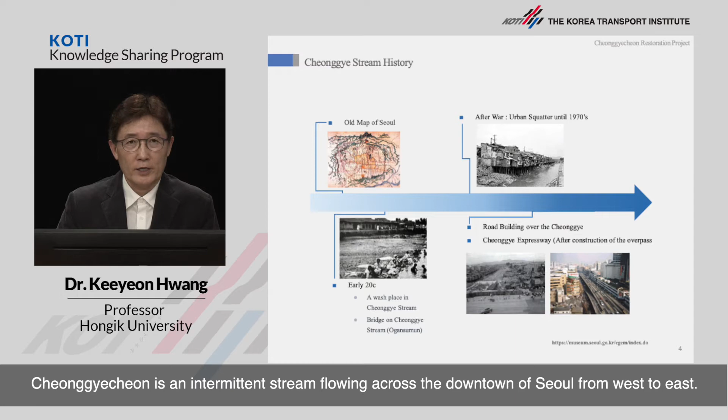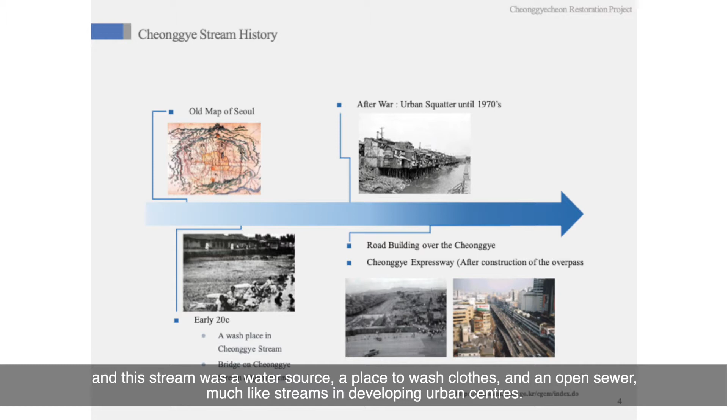Cheonggyecheon is an intermittent stream flowing across the downtown of Seoul from west to east. In 1412, at the beginning of the Joseon dynasty, King Taejong ordered for a brook developed into a stream named Cheonggyecheon. In the early 20th century, there were less than 1 million people in Seoul, and this stream was a water source, a place to wash clothes, and open sewer, much like streams in the developing urban centers.

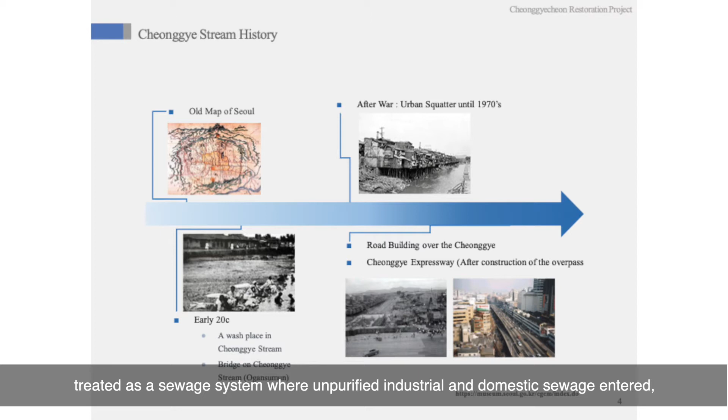After the Korean War in 1953, the stream was mostly home to squatter houses and squatter factories, treated as a sewage system where unpurified industrial and domestic sewage entered. Waste was discarded and the water was polluted and smelly with colors changing. Starting in 1958, Cheonggyecheon was covered gradually due to the lack of funds and skills to manage the contaminated stream.

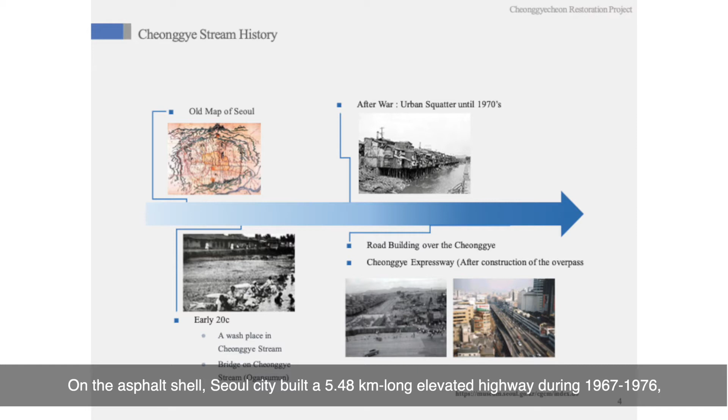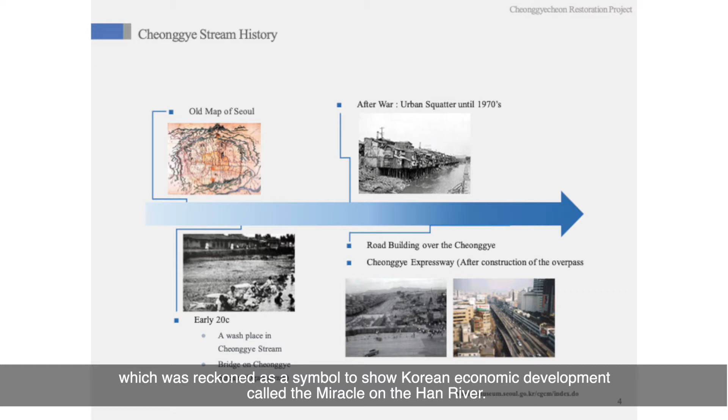On the asphalt shell, Seoul City built a 5.48 kilometer long elevated highway during 1967 to 1976, which was reckoned as a symbol to show Korean economic growth, called Miracle on the Han River. Being closer to the new millennium, no longer did the elevated highway function as an auto mobility supplier from suburbs to the downtown. Rather, a safety issue arose.

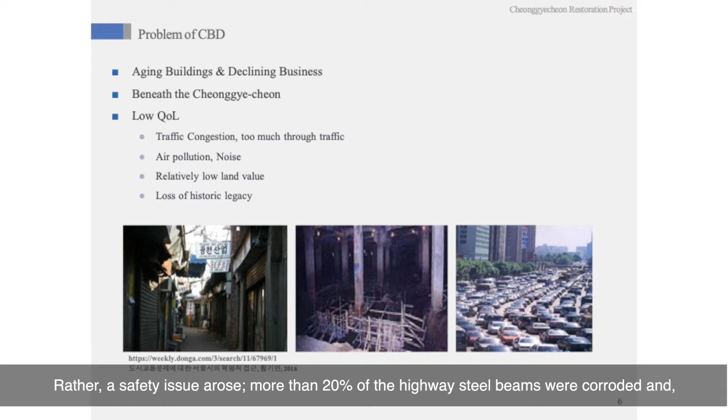More than 20% of the highway steel beams were corroded, and in order to fix it, an estimated $100 million would be needed. In a survey conducted by the Seoul Institute, Seoul citizens expressed their wish for livable, human-scaled, and environmentally friendly urban structures, which was not prioritized during a rapid economic growth.

Former mayor of Seoul, Lee Myung-bak, pledged to implement the Cheonggyecheon project when he was mayoral candidate. Being elected in 2002, Seoul Metropolitan Government officially adopted it as the landmark policy of his administration. After many studies conducted by the government and Seoul Institute, including a feasibility study from July 2002 to February 2003, a public hearing and environmental review process was carried out in 2003.

The Cheonggyecheon restoration project began on July 1st, 2003 and was completed on September 30th, 2005. We were able to shorten the construction period by almost half than what was predicted, with the construction being launched simultaneously in 3 relatively evenly divided sections.

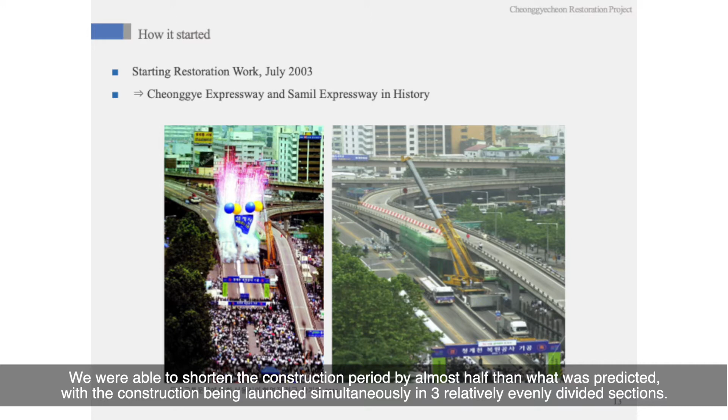A shift in functional, social, and environmental paradigms led to the Seoul citizens' request of dismantling the elevated highway and restoring the ancient stream. Seoul policymakers shifted the urban paradigm from development to conservation, from auto mobility to pedestrian friendly, and from efficiency to equality. The entire restoration work progressed according to these principles.

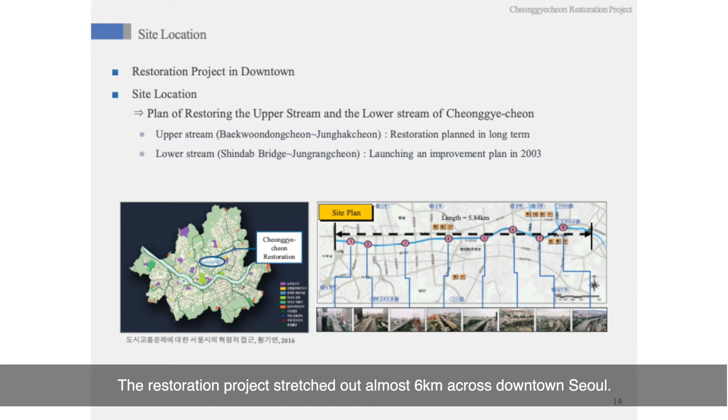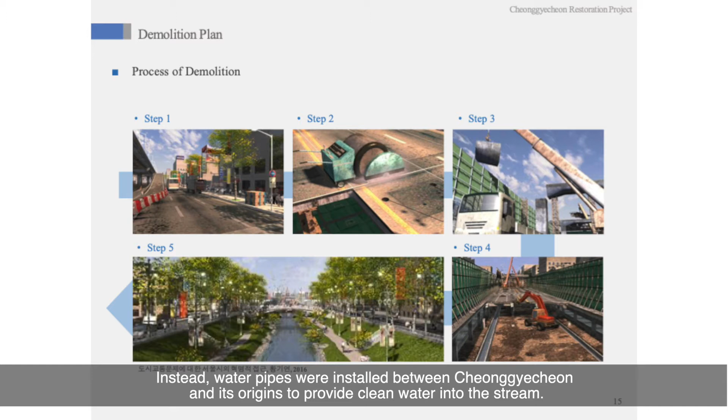The restoration project stretched out almost 6 kilometers across downtown Seoul. Some ecologists argue that the restoration should start from the upper reaches of Cheonggyecheon. However, due to traffic problems and costs, the extension to the original water source was delayed until the second phase of the restoration project. Instead, water pipes were installed between Cheonggyecheon and its origins to provide clean water into the stream.

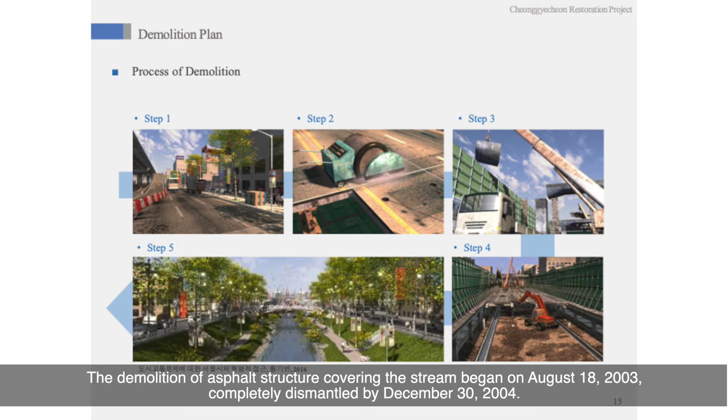Demolition work started on July 1st, 2003, and the Cheonggyecheon elevated highway was completely dismantled on October 5th, 2003. Demolition of the asphalt structure covering the stream began on August 18th, 2003, completely dismantled by December 30th, 2004. In order to reduce noises and dust during the work, the city used diamond wire saws and wheel saws.

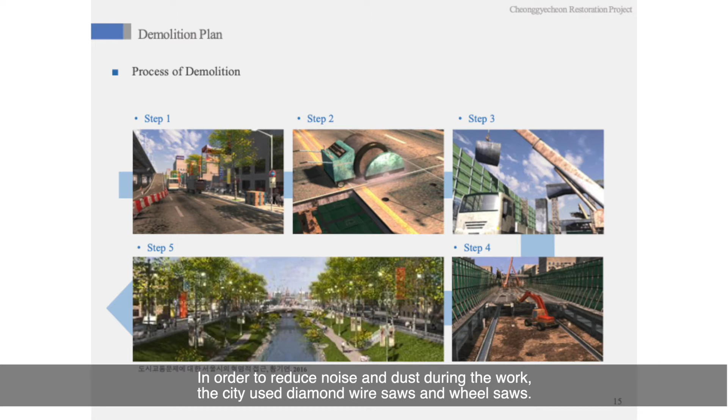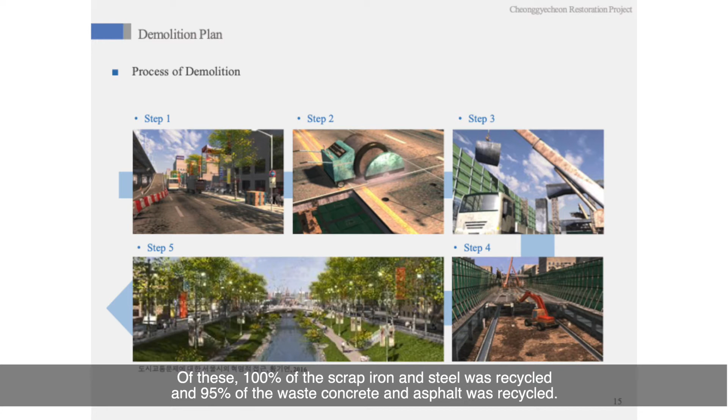A total of 680,000 tons of waste was generated during the demolition work. Of these, 100% of scrap iron and steel was recycled, and 95% of the waste concrete and asphalt was recycled. Cheonggyecheon was designed to be restored as an urban natural stream and as a human and environmentally friendly space with waterfronts and sidewalks along the banks.

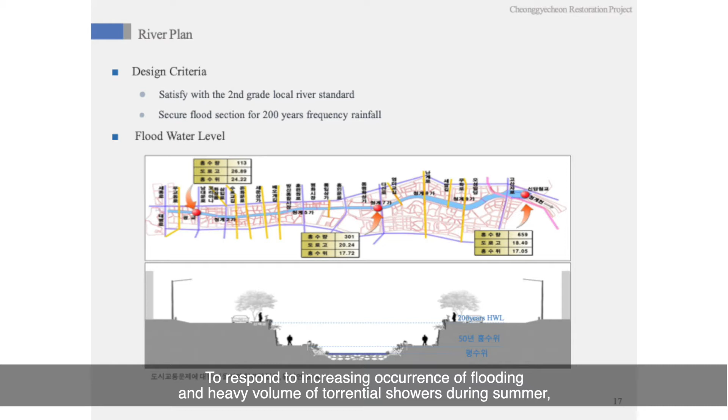Flood management was placed top priority in designing the stream. To respond to increasing occurrence of flooding and heavy volume of torrential showers during the summer, the city built embankments that can withstand a 200-year level of extreme flood.

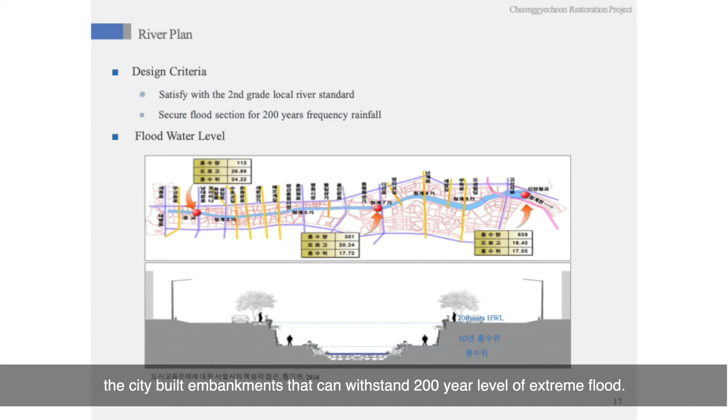Also, the minimum number of bridges were planned in order to transmit the maximum amount of water in a short span of time, and some road structures were kept intact to further the amount of water flow during the heavy rain season. Terraces and lower level sidewalks were built along the upper and lower reaches of the stream to create a water-friendly environment.

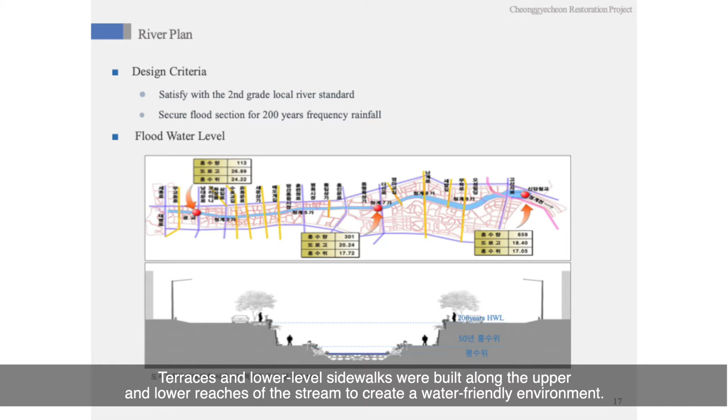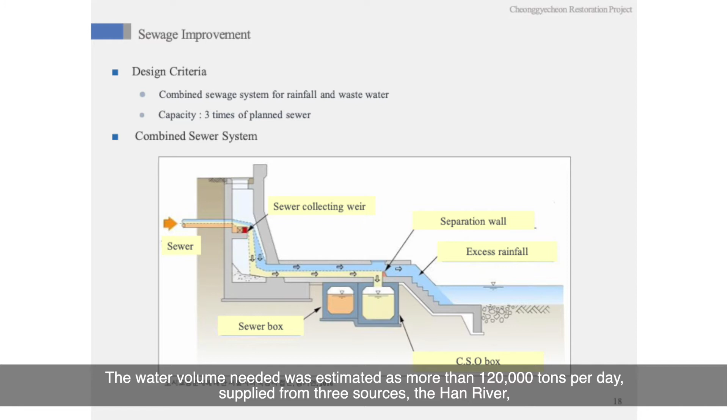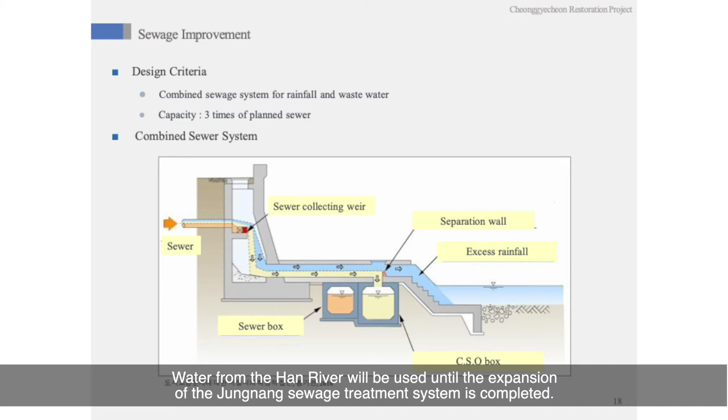Cheonggyecheon is an intermittent stream which requires additional water provision to maintain the design guidance of maximum 40 centimeters of water over the years. The water volume needed was estimated as more than 120,000 tons per day, supplied from three sources: the Han River, underground water, and water treated at the Jungnang sewage treatment plant. Water from the Han River will be used until the expansion of the Jungnang sewage treatment system is completed. The waters are flown into the stream from 4 dischargers.

Target level of water quality is second class, BOD 3 milligrams per liter. The sewage system is designed to transmit a total of 1.95 million tons a day, 3 times the maximum sewage generated from the Cheonggyecheon area.

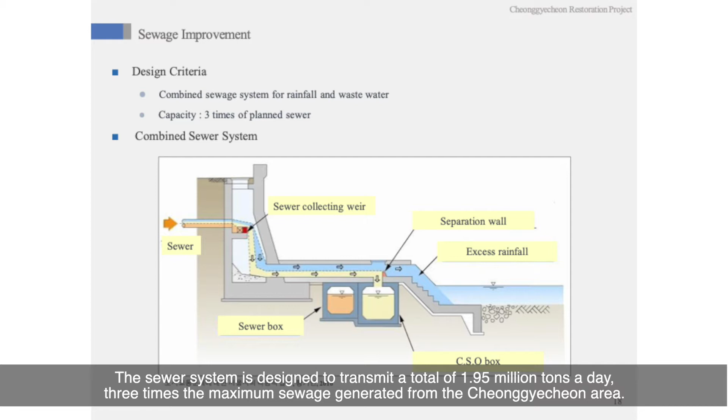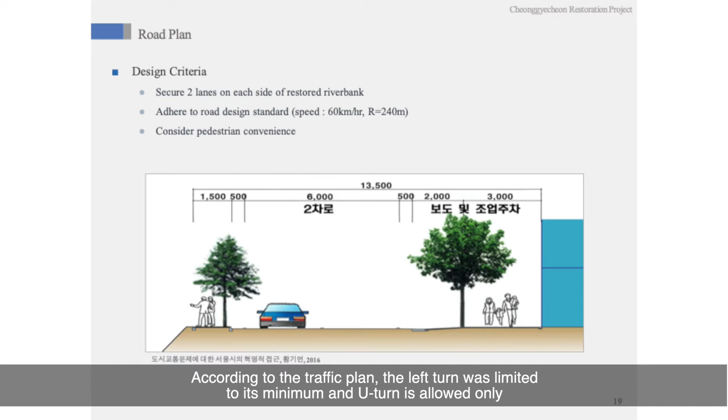Both sides of the stream are as wide as 13.5 meters to accommodate 2-lane street per direction, sidewalks, loading and unloading spaces for businesses. The restored stream is accessible from 17 locations. According to the traffic plan, the left turn was limited to its minimum, and U-turn is allowed only at 3 locations to protect the stream environment from car emissions.

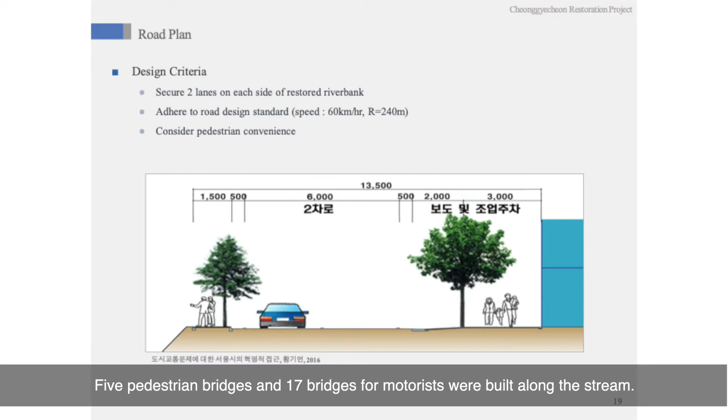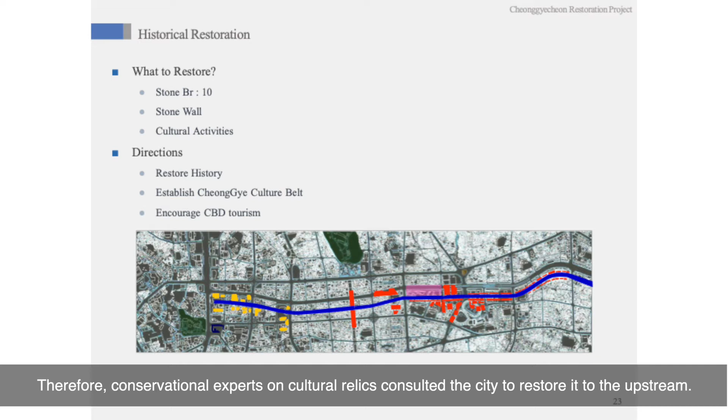5 pedestrian bridges and 17 bridges for motorists were built along the stream. The restoration of Gwang Bridge from the underground, one of the main relics of the Joseon dynasty, caused problems because its original form was severely damaged, and the location is at the center of an important traffic intersection. It was challenging to restore at its original location because of traffic concerns. Therefore, conservational experts on cultural relics consulted the city to restore it to the upstream.

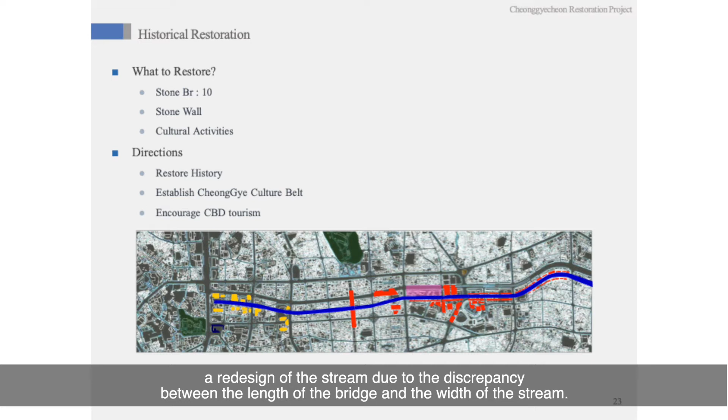Relocating another old stone bridge called Supyo Bridge to where it was originally placed required a redesign of the stream due to the discrepancy between length of the bridge and the width of the stream. For the Ogansu Bridge, it had a slim chance of being restored to its original form, although its existence was confirmed. Restoration of all the bridges was determined based on a detailed index survey on relic restoration.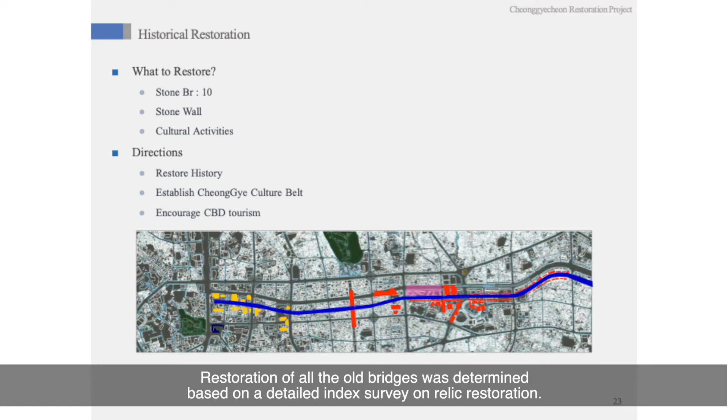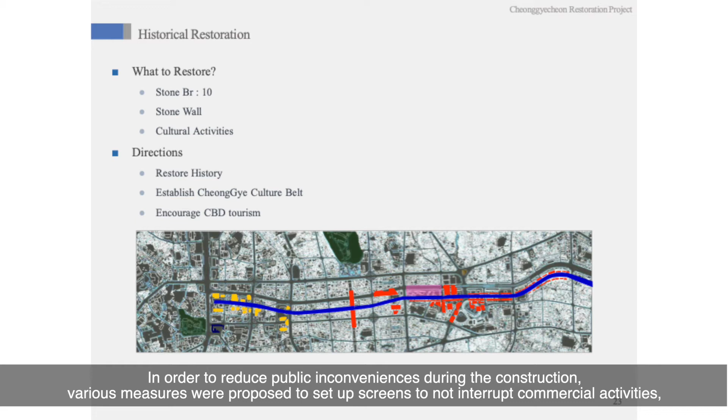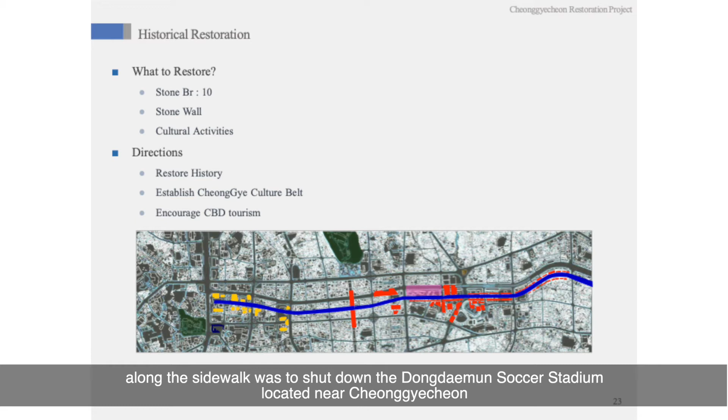In order to reduce public inconveniences during the construction, various measures were proposed to set up screens to not interrupt commercial activities and to maintain loading, unloading parking spaces along Cheonggyecheon Street. One dramatic measure to respond to street parking storage shortages during the construction and to erupting street vendors' complaints conducting their businesses along the sidewalk was to shut down the Dongdaemun soccer stadium located near Cheonggyecheon and to rearrange it into a temporary parking lot and business ground for street vendors.

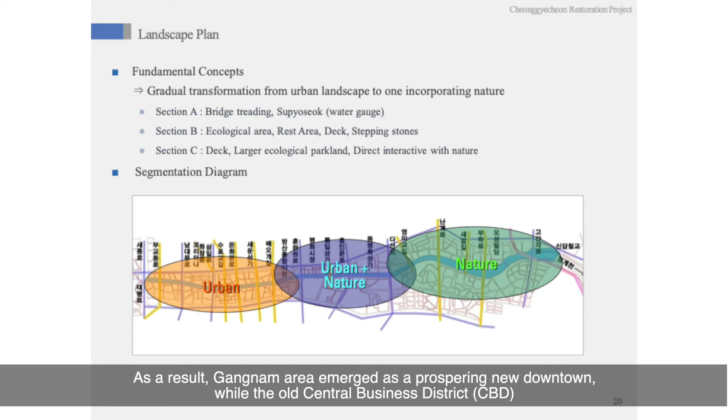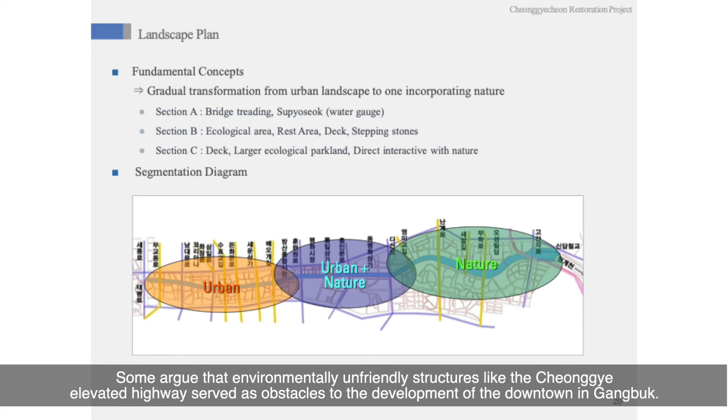For the last several decades, Seoul City exerted its effort to develop Gangnam area. As a result, Gangnam area emerged as a prospering new downtown while the old central business district located in Gangbuk area became dull. Some argue that environmentally unfriendly structures like Cheonggye Elevated Highway served as obstacles to the development of downtown in Gangbuk. Now that the obstacles have been removed through the Cheonggyecheon restoration, the Gangbuk area should revive into an eco-friendly downtown. Along with the restoration, the old downtown was expected to be reborn as a historical and cultural center, a business and commercial center, and the center of tourism and shopping.

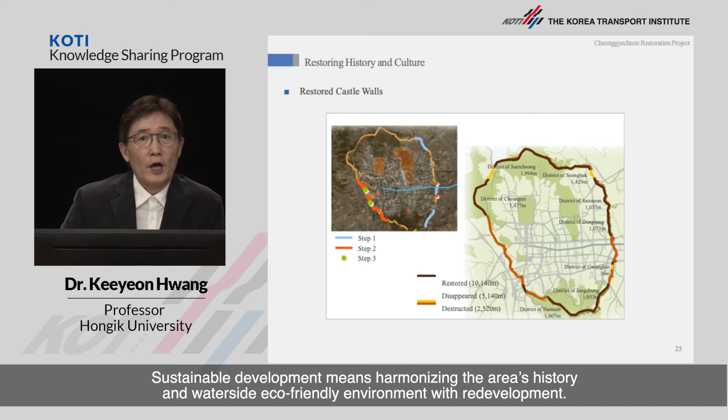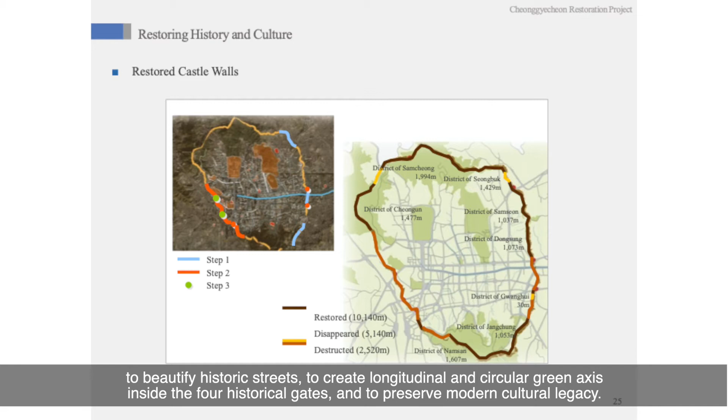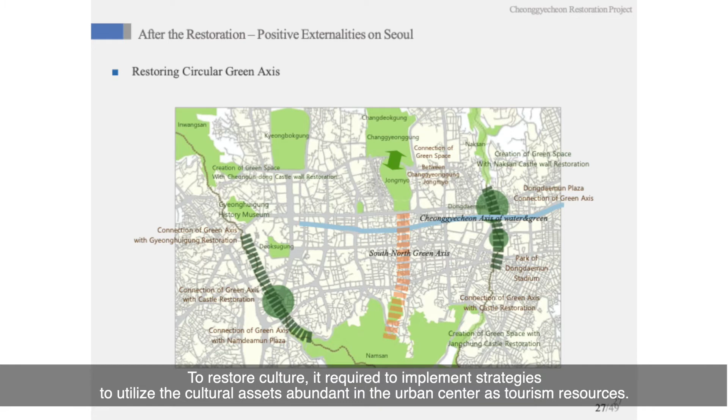The revitalization plan had two goals. One is the preservation of history and environment, and the other is pursuit of sustainable development. Sustainable development means harmonizing the area's history and waterside eco-friendly environment with redevelopment. In efforts to restore the history of the downtown area, the following restoration works were implemented: to restore Seoul Castle walls, to beautify historic streets, to create longitudinal and circular green axis inside 4 historical gates, and to preserve modern cultural legacy.

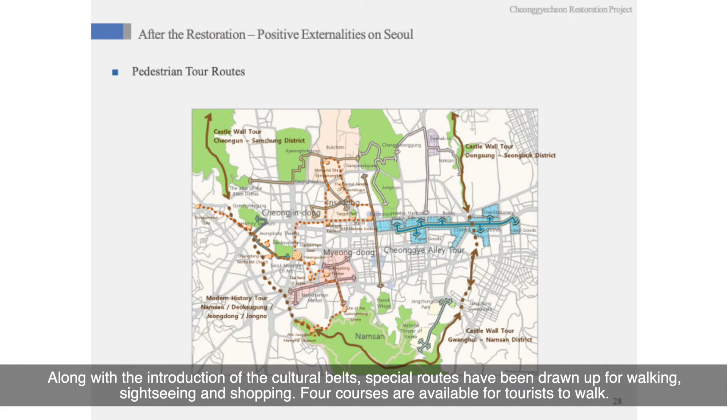To restore culture, it is required to implement strategies to utilize cultural assets abundant in the urban center as tourism resources. One of them is designing several cultural belts. Along with introduction of the cultural belts, special routes have been drawn up for walking, sightseeing, and shopping. 4 courses are available for tourists to walk. A new plan that aims to digitize the stream is on the way as well. It will add more contents to Cheonggyecheon to create a more attractive stream filled with cultural fun and activities.

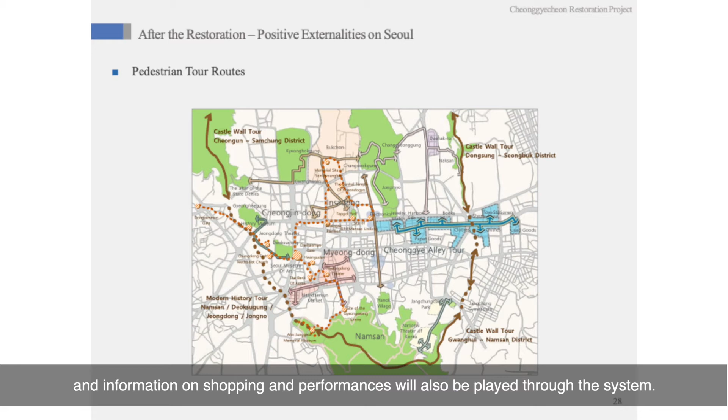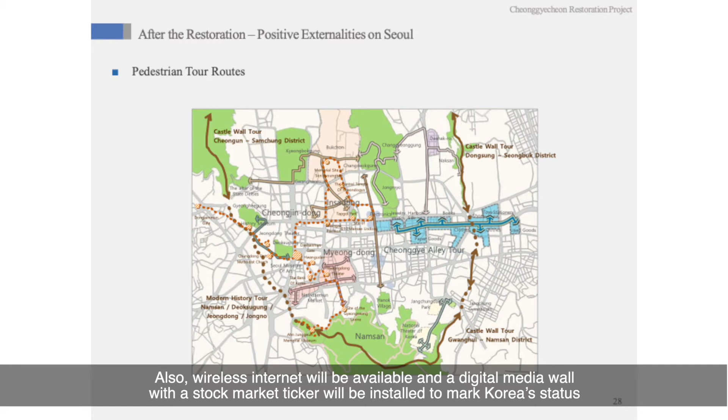By next year, visitors will be able to hear about the history of Cheonggye Stream and the local area by using personal digital assistant, and information on shopping and performances will be also played through the system. Also, wireless internet will be available, and a digital media wall with a stock market ticker will be installed to mark Korea's status as one of the most economically developed countries in the world.

It is essential to upgrade our transportation system in order to revitalize urban functions. A vehicle-oriented transportation environment should be changed into a human-oriented, eco-friendly one to enhance the competitiveness of the downtown area. For that purpose, the city introduced a new form of mass transit system and improved pedestrian environment. Moreover, transportation demand management was strongly enforced to lower traffic congestion and air pollution from excessive traffic. Active investment in public transportation was required to improve accessibility to urban center.

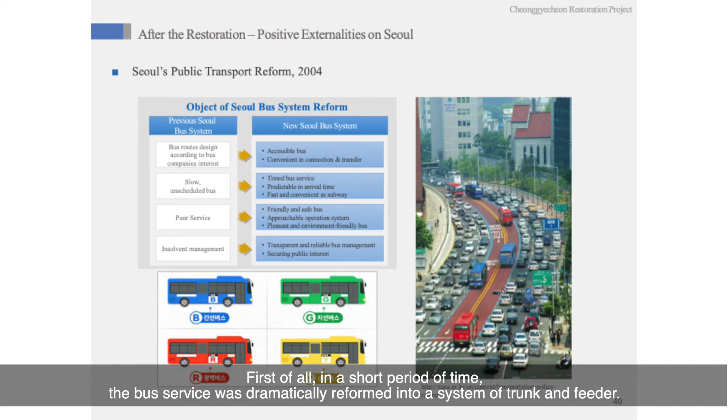First of all, in a short period of time, the bus service was dramatically reformed into a system of trunk and feeder. Also, the city introduced median bus lane system in the downtown area to better manage bus flows accessing city center.

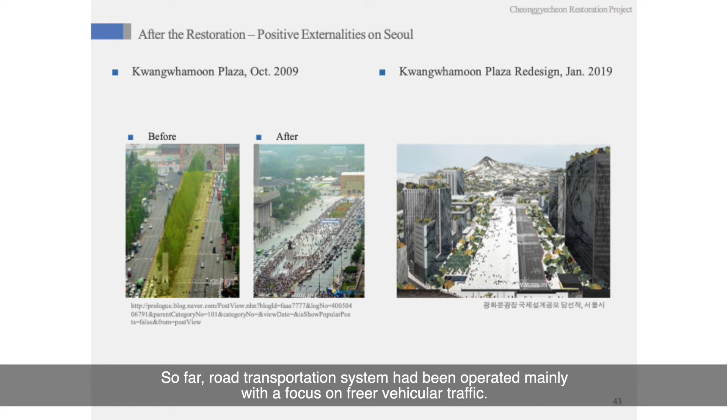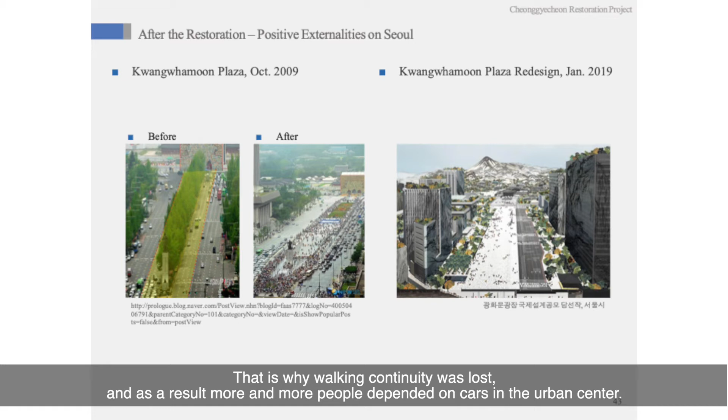So far, a road transportation system had been operated mainly with a focus on freer vehicular traffic. That is why walking continuity was lost, and as a result, more and more people depended on cars in the urban center. The most important thing to improve pedestrian environment was to expand pedestrian crossings and to promote sidewalk environment.

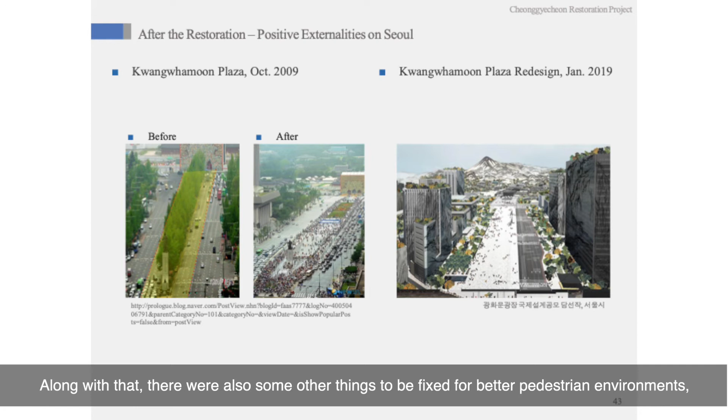The main road called Kwangwhamoon in Seoul was reborn as a pedestrian-friendly street as the city reduced traffic lanes and introduced pedestrian mall instead. Along with that, there are also some other things to be fixed for better pedestrian environment. For instance, signal system considering walk flow, additional installation of crossings, expansion of crossing width, and crossroad structures improved for more crossings.

Historically, major public projects in Korea had mostly undergone difficulties because of conflicting interests among stakeholders. The Cheonggyecheon project was no exception, with Mayor Lee Myung-bak leveraging it for the following presidential election, with a merchant group worrying about losing their decades-old business platform in downtown, and civic groups sticking firmly to their causes such as sustainability and historic preservation in the midst of conflicting interests.

Tripartite governance system was formed to resolve the problem, composed of Seoul City's Cheonggyecheon Restoration Bureau, Citizens Committee encompassing scholars, experts, and NGO representatives regardless of their political preference, and the Seoul Institute in charge of developing the restoration master plan. Also, the city introduced a special task force team solely dedicated to conflict management, dealing with stakeholders who were mostly merchants conducting old-fashioned businesses in the vicinity of the stream.

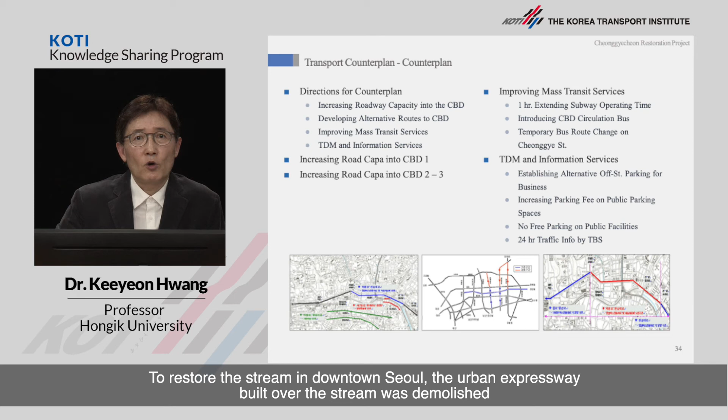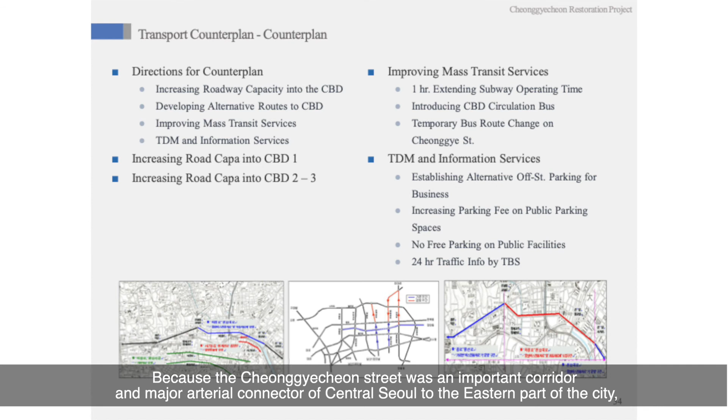To restore the stream in downtown Seoul, the urban expressway built over the stream was demolished, and the number of lanes was reduced from 6 to 8 lanes in one direction to 2 lanes in each direction. Because Cheonggyecheon Street was an important corridor and a major arterial connector of central Seoul to the eastern part of the city, many people thought that changes made to this would lead to traffic chaos in the downtown area.

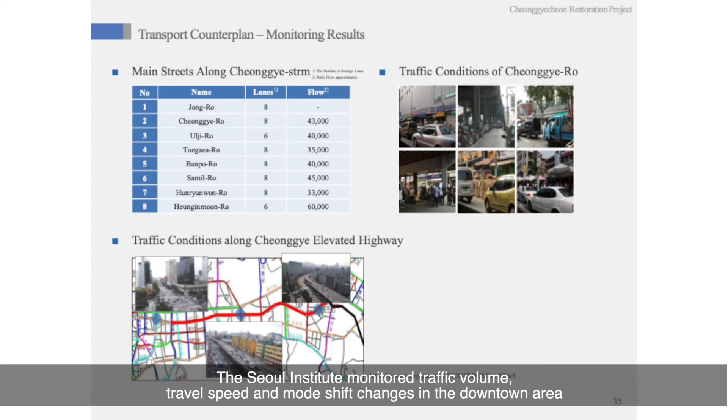Seoul Institute monitored traffic volume, travel speed, and mode shift changes in the downtown area and conducted travel behavior surveys to analyze the impact of capacity reduction. The impact study included both a short-term monitoring right after the restoration work and then continued monitoring over a period of 2 years to determine the longer-term impact on Seoul traffic.

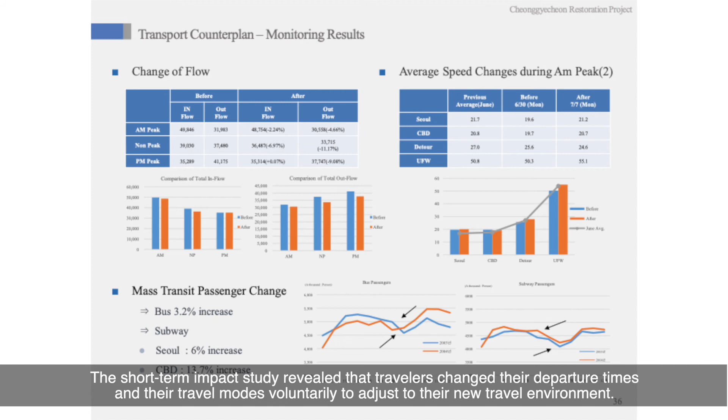The short-term impact study revealed that travelers changed their departure times and their travel mode voluntarily to adjust to their new travel environment. Therefore, traffic volume in the downtown area decreased while the surrounding travel speed did not drop to a significant level. No concerning traffic crisis broke out, as opposed to the worries from some transportation specialists. There was no significant level of service drop even in the downtown area where the construction had been taking place.

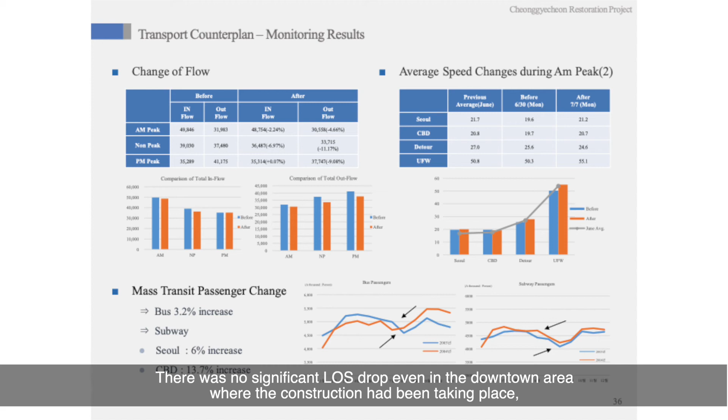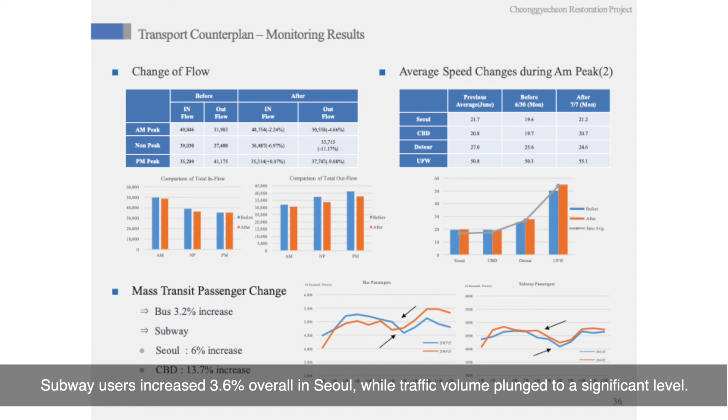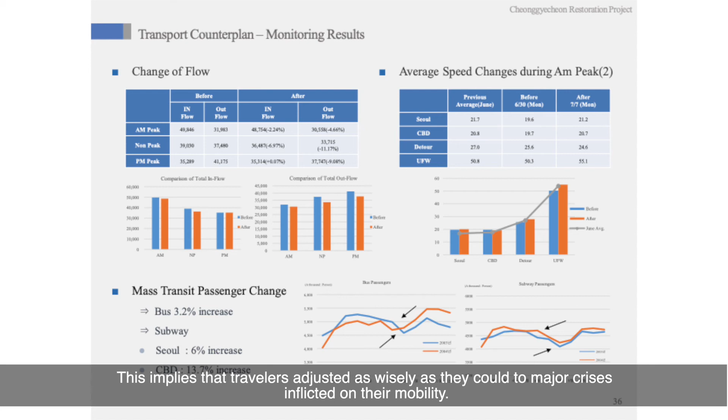Only 1.3% of downtown residents complained about worsened traffic. Subway users increased 3.6% overall in Seoul, while traffic volume plunged to a significant level. Subway passenger volume increased for 2 weeks in a row after the restoration work started, but the number of bus passengers did not change significantly. This implies that travelers adjusted as wisely as they could to major crises inflicted on their mobility.

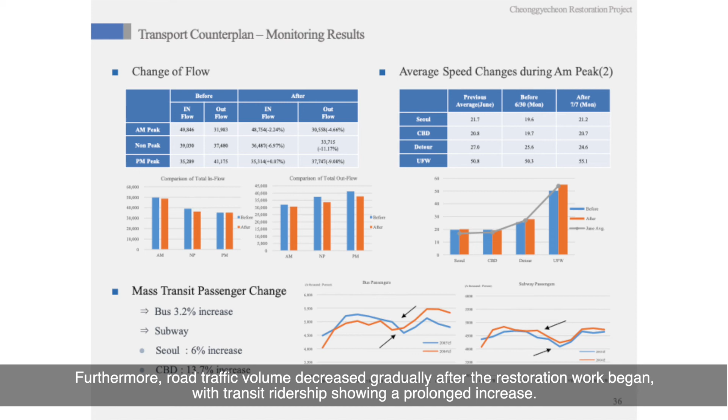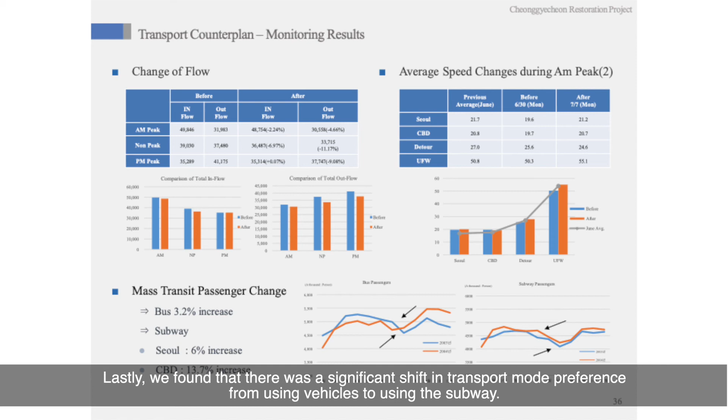The longer-term analysis indicated that travel speed recovered continuously to pre-construction levels. Furthermore, road traffic volume decreased gradually after the restoration work began, with transit ridership showing a prolonged increase. Lastly, we found that there was a significant shift in transport mode preference from using vehicles to using subway.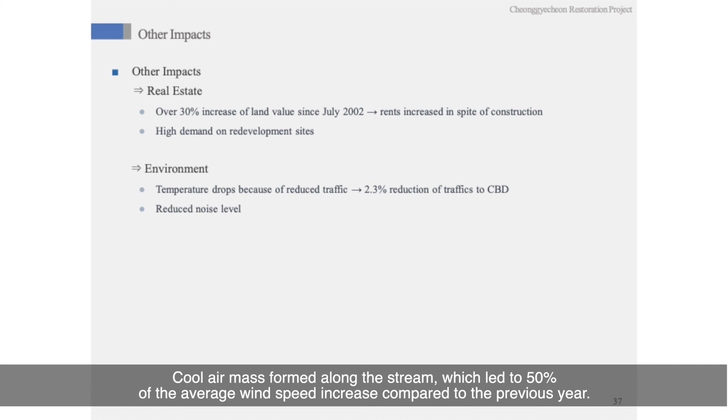Air quality and temperature in the downtown area showed a noticeable sign of improvement. Cool air mass formed along the stream, which led to a 50% average wind speed increase compared to the previous year. The fastest one recorded 3 meters per second in the summer of 2005. In addition, beyond the previous temperature estimation of a 0.3 to 0.8 Celsius drop with the restored stream, a later study revealed that temperature near the stream recorded a 3 Celsius degree drop during the summer of 2005.

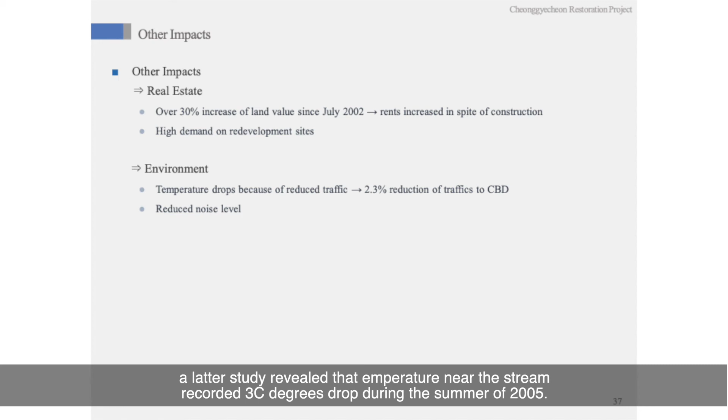Because of reduced traffic, the estimate of economic value of air pollution reduction was calculated to be up to 40 billion Korean won per year in Seoul. A citizen survey showed that each household was willing to pay 130,000 Korean won per year in the form of a compulsory tax for this environmental improvement. This amounts to 356.2 billion Korean won per year in the entire Seoul and approximates the total restoration cost of 390 billion Korean won.

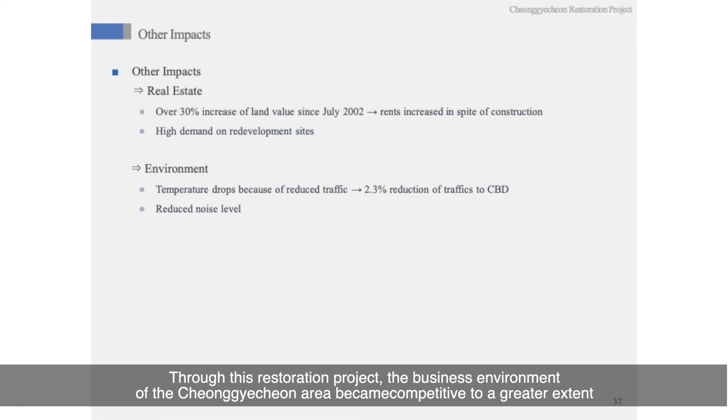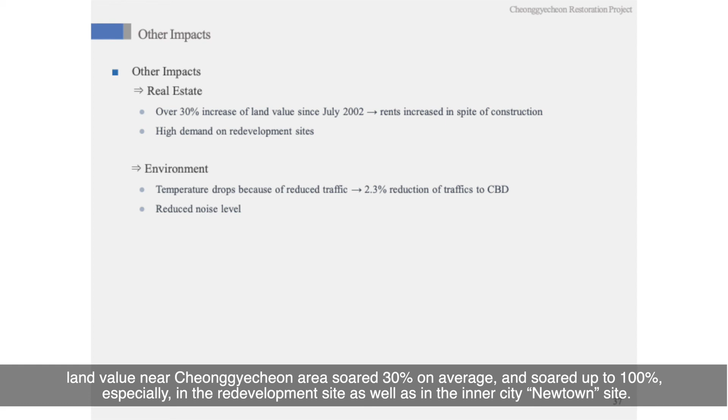Throughout this restoration project, the business environment of the Cheonggyecheon area became competitive to a greater extent, and its industrial structure was on the verge of renewing, contributing to the booming of the downtown economy. According to a monitoring study on real estate price changes after the announcement of the restoration, land value near the Cheonggyecheon area soared 30% on average and up to 100%, especially in the redevelopment site as well as in the inner city Newtown site.

The rent of commercial buildings increased beyond 5% on average, while the luxury Gangnam area's rent did not change at all. The direct economic impact of capital investment was expected to be up to 22 trillion Korean won, maximum when the full-fledged redevelopment went into action.

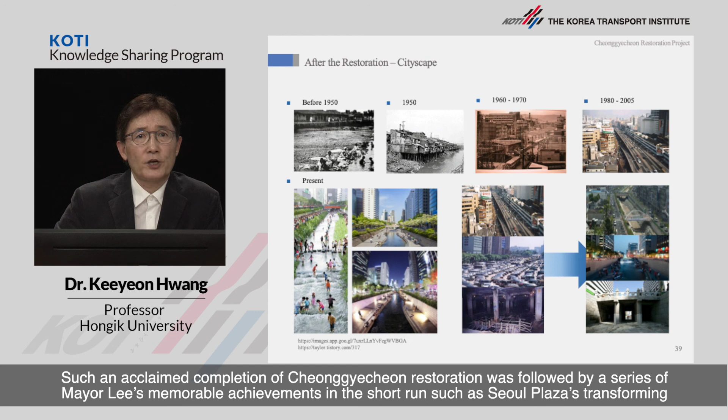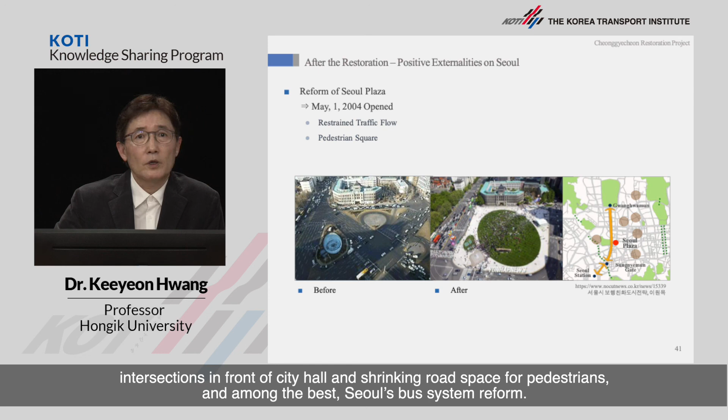Such an acclaimed completion of Cheonggyecheon restoration was followed by a series of Mayor Lee's memorable achievements in the short run, such as Seoul Plaza, transforming intersections in front of the city hall and shrinking road space for pedestrians, and among the best, Seoul's bus system reform. Once the success of this project was apparent, every part of Seoul wanted one. Other overpasses were removed under the Sky Opening Initiative.

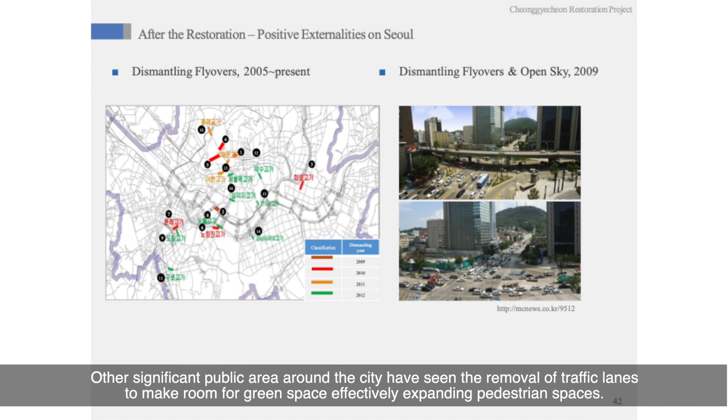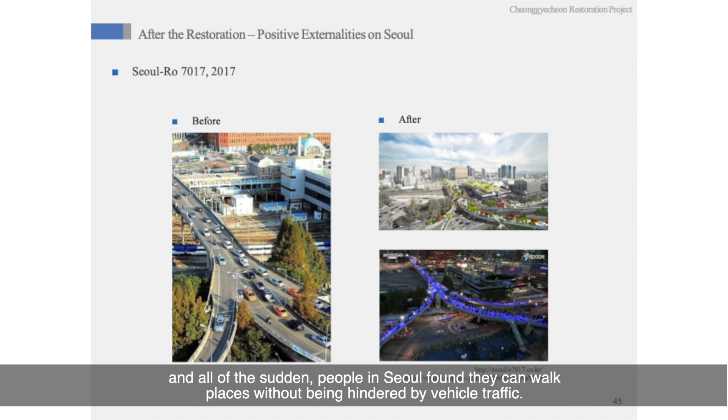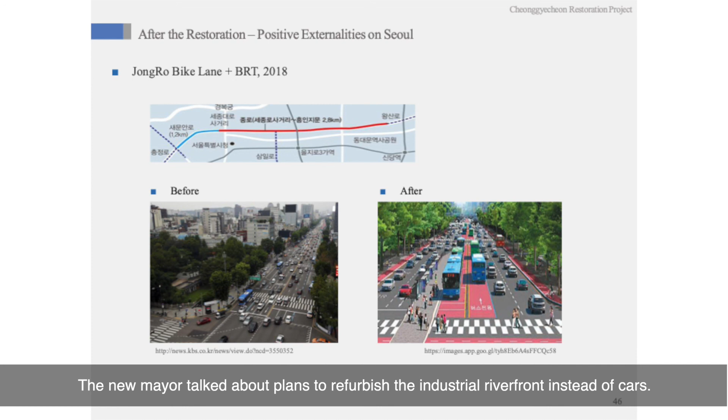Other significant public areas around the city have seen removal of traffic lanes to make room for green space, effectively expanding pedestrian spaces. There was a renaissance across the central business district with more people touring into the center, greenways popping up across the city, and all of a sudden people in Seoul found they can walk places without being hindered by vehicle traffic. The new mayor talked about plans to refurbish the industrial riverfront instead of a car.

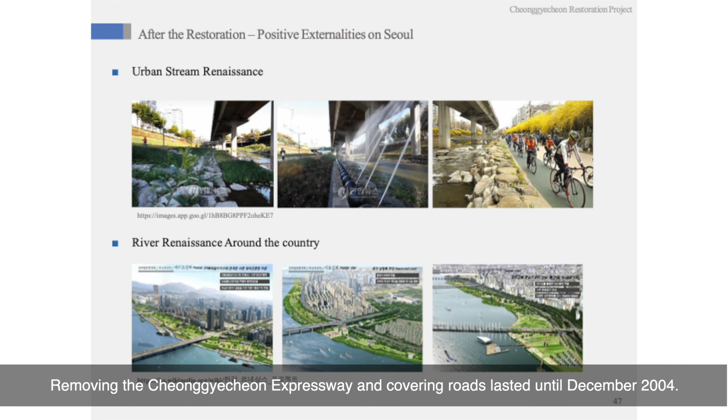Seoul's city paradigm has changed since the project from a car-oriented one to a human and environment-oriented one, upending government investment criteria in favor of rails rather than roads. Removing the Cheonggyecheon Expressway and covering road lasted until December 2004. Not only did the project aim to provide an open space and fresh watercourse instead of an obstructing highway in the downtown area, but also to reclaim the historical and cultural identity of Seoul as a 600-year-old city.

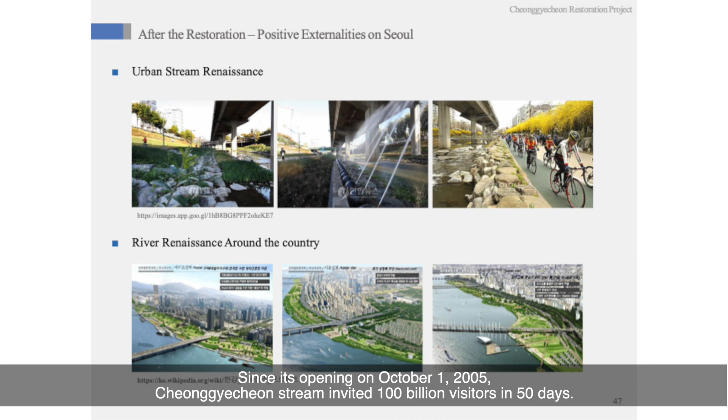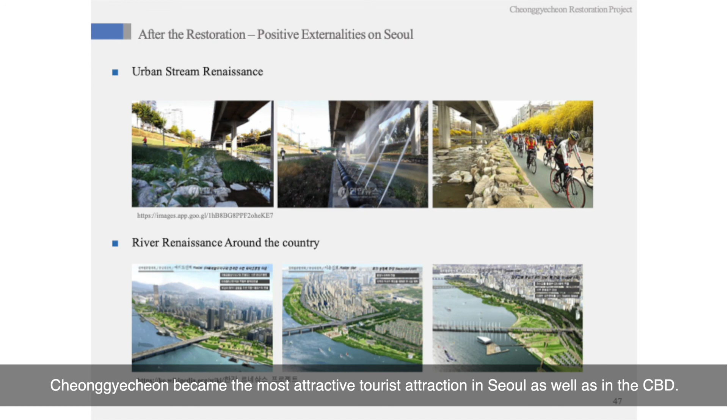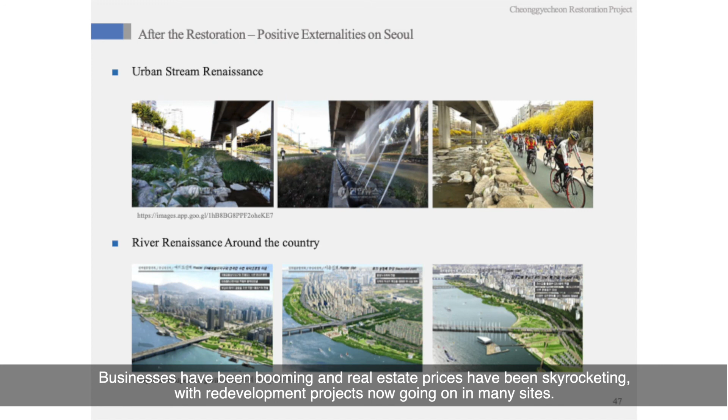Business has been booming and real estate prices have been skyrocketing with redevelopment projects now going on in many sites in downtown Seoul. Eventually, this restoration project will provide the opportunity for Seoul to transform into a hub city in Northeast Asia and an international finance center, and most importantly help achieve a balanced growth between the northern and southern parts of Seoul city.